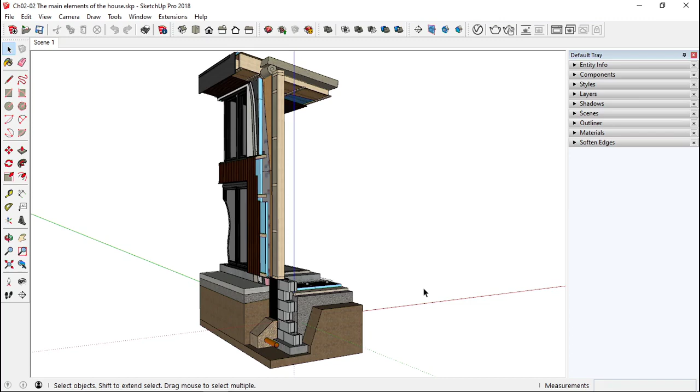Chapter 02-02, the main elements of the house. These are the things that we are considering, and the main elements of this house, like most houses, tend to be a roof, a wall, and a floor. Okay, the sub-elements that we could consider, things like windows and doors, and how they relate to everything else.

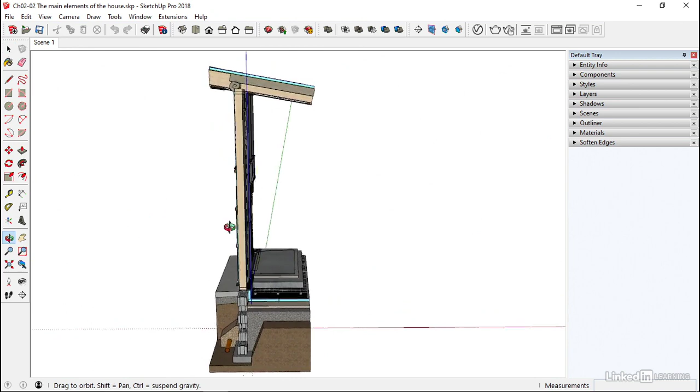So what we're going to try to do in this series is focus on these key elements and the sort of design considerations that you need to think about when you are putting these together. Now, outside of design considerations, we are also looking at potential client involvement. There might be things like budget constraints. It might be that in certain locations that things just can't be done.

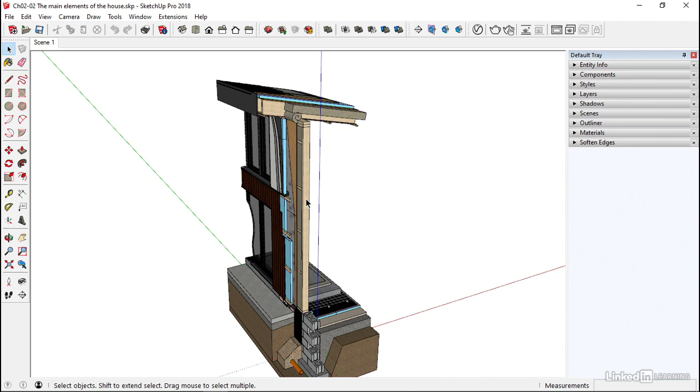This is designed for a particularly cold climate, so it wouldn't necessarily be the same if you were designing for a warm, humid environment. So all the sorts of things that we are considering for this might not be appropriate for other situations. Nonetheless, we will still probably have a roof, we will still probably have a wall, and we will still probably have a floor, and also in the wall we'll probably have windows and doors. Okay, so regardless of the situation, we need to think about this in those sorts of ways.

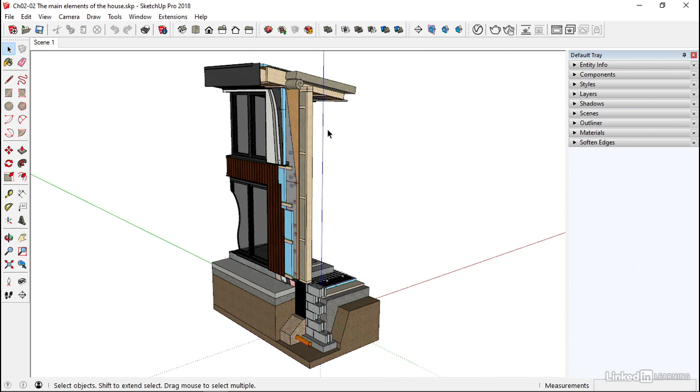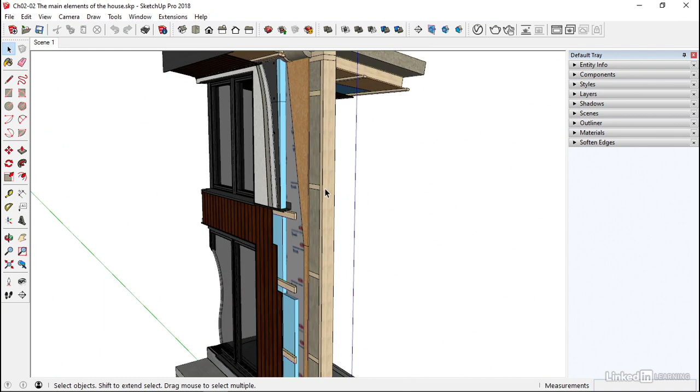One thing we need to consider is whether the wall is going to be strong enough to hold the roof up, whether the wall is going to be able to anchor the roof down so it doesn't blow away, whether the roof is going to be insulated correctly, whether we go for a warm roof or a cold roof or a ventilated roof, a non-ventilated roof. Wall considerations would be, is it going to be timber frame? Is it going to be brick and block? Is it going to be something else? Okay, there's lots and lots of different ways to make a wall.

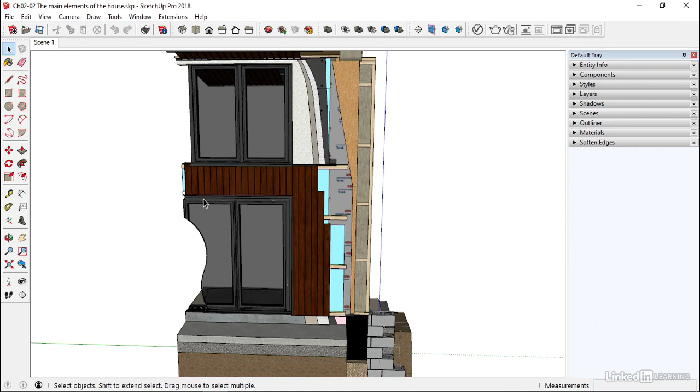And then once we've thought about all of these things, then we've got to consider openings. Okay, do we need to think about the positioning of this? Is this going to be affected by facing brick on the outside, or are we okay with just positioning these things wherever we want? On a timber frame building, you've pretty much got carte blanche to put things where you want. In the case of the cladding on the ground floor, then we've got to think of the size of the cladding and make sure that that corresponds to the door opening sizes. So these subtle changes are going to affect the sorts of things we do when we design.

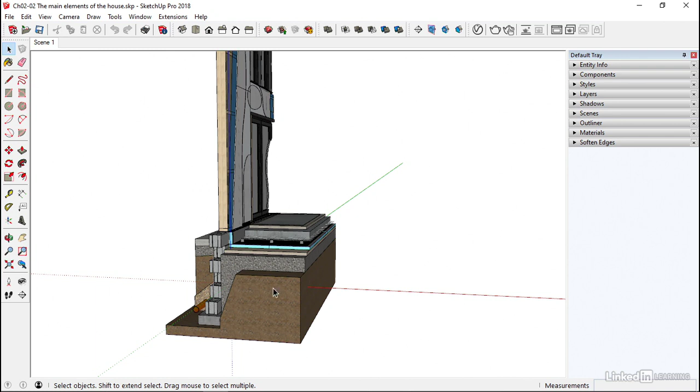We come down to the floor. We've got lots of different floor options. In this case, I've gone for a ground bearing slab. In other situations, we might have crawl space underneath. So that would possibly mean tanking or making sure the whole thing was waterproof. We might have to put barriers down to stop gases coming up through our floor. There are all sorts of different considerations that we need to follow. And we follow those by looking at building code, whether it's the UK building regulations or the code in the States.

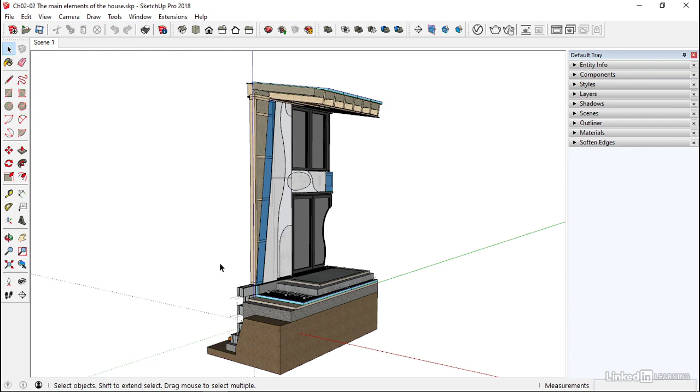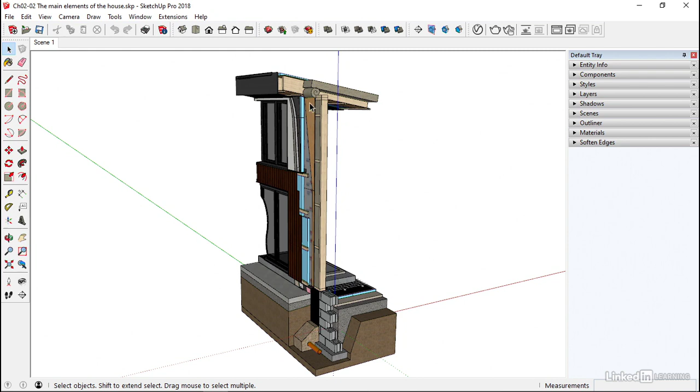So armed with that information, armed with some money from your client, the go-ahead from the client, the agreement of the building control people, the agreement of the planners, a suitable and competent construction team, then you should be ready to go. But none of this will be really feasible without a good sense of understanding the details that make up the construction. Okay, and that's what we're going to be covering in this series. Now, in the next couple of videos, we're going to look very quickly at some of the layering options that we need to consider, and then we can crack on with putting this thing together.